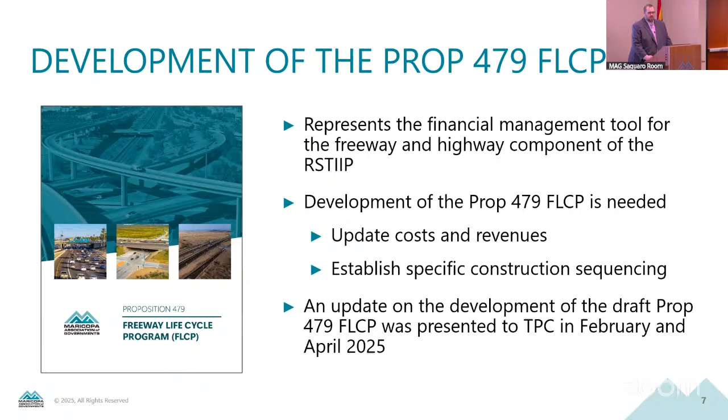As I had noted, this really builds upon several presentations that we've had here at TPC before, first in February when we talked through several key concepts, and then last month when we went through the draft program itself.

So as we're talking about the Prop 479 freeway program, there's some considerations we need to keep in mind. First, we have a statutory requirement that the program has to be balanced over the term of the half-cent sales tax, so we need to build what we call a fiscally constrained program between fiscal year 2026 and 2045. As I had mentioned, we also need to work through the sequencing exercise. Specifically, we need to identify near-term project sequencing.

Over the 20-year life of the program, there'll be a number of changes, but as we sit on the horizon of fiscal year 2026, it's really important that we identify those initial projects and get them sequenced. And then finally, there's been a number of changes since the plan was approved. Development patterns have changed, needs have changed. We've done additional study work, additional analysis, and so we need to start to incorporate some of those changes as appropriate.

Building on what we had previously talked about, some of the financial considerations that went into the program, we used updated revenue estimates that were generated last fall. This follows our standard protocol. We've been doing this for a number of years in partnership with ADOT to update our revenues, and so those revenues are factored in as part of this program.

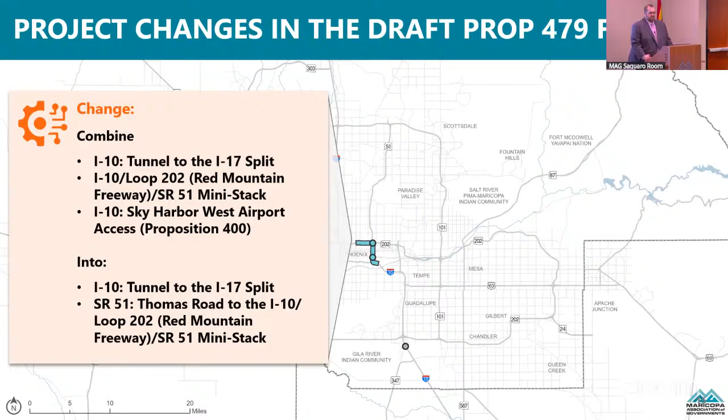And then finally, this is just reflecting updated study work that we did to reorganize, reorient those projects on Interstate 10 between the tunnel and the split. This builds off the study that was recently accepted by the MAG Regional Council, identifying initial sequencing of that project, where we would start first with the 51, take care of the mini stack, and then come through on Interstate 10.

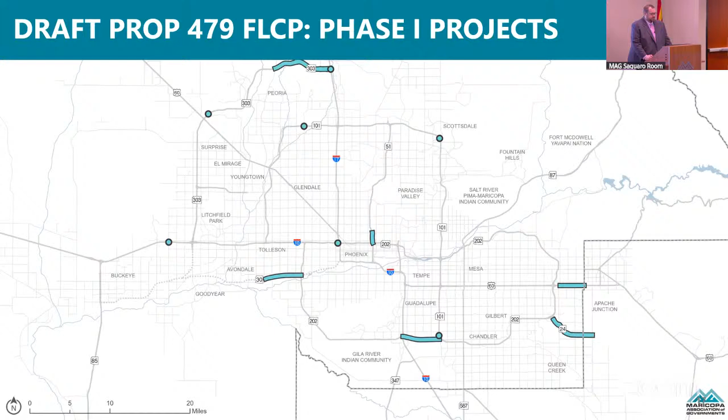Next, I want to touch on phase 1 construction projects. Here is a map of all those projects programmed in the draft program in phase 1. I want to walk through several of the short-term ones.

Starting first in the North Valley, Loop 303 at I-17. Today this is an interim system interchange, so you have to get off the freeway, stop at a traffic light, and make a left-hand turn to get onto the 303. A notable development in the last couple of years is the significant amount of development coming up here, including the Taiwan Semiconductor Manufacturing Company. Because this is an interim interchange, traffic is backing up onto the I-17 main line. This project has been under design for the last several years, funded through state appropriation. It will be ready to go to construction, and the program supports initiating its construction this summer. This would be the first Prop 479 project to go to construction.

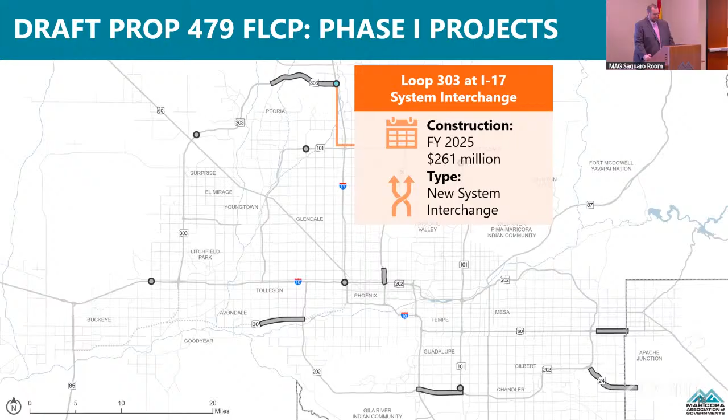We have several more in fiscal year 2026 in the program. We have I-10 at Jackrabbit Trail, another project where a lot of development in the area is overloading the existing interchange, which is in desperate need of improvements. We're also finishing the Loop 303 up in the North Valley to complement that system interchange project, and down in the Southeast Valley, turning State Route 24 into a full freeway. Today it's an interim freeway, two lanes in each direction, with stoplights along the major mile streets. This would turn the facility into a full freeway.

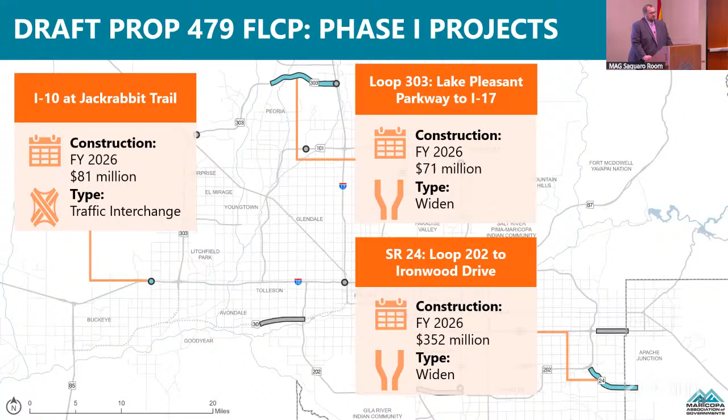In fiscal year 2027, we have several other projects highlighted by State Route 30. The first portion, which I'll talk about later, is building that new freeway between 97th Avenue and Loop 202, programmed for construction in fiscal year 2027. That's a $1.2 billion effort, but we'll be able to go to construction as soon as final design is done, which is underway now, along with completion of the Loop 202 Santan out in the Chandler area.

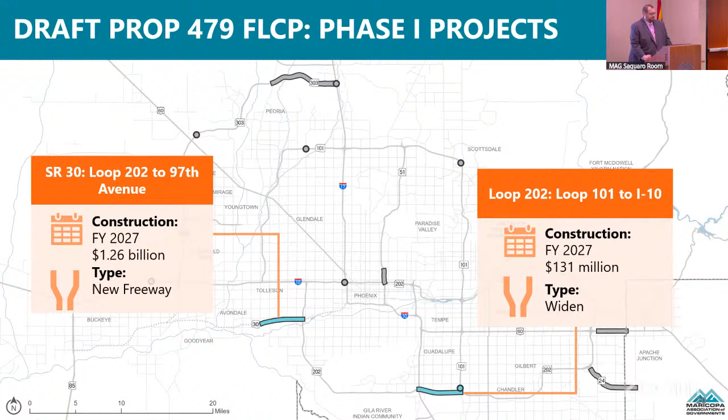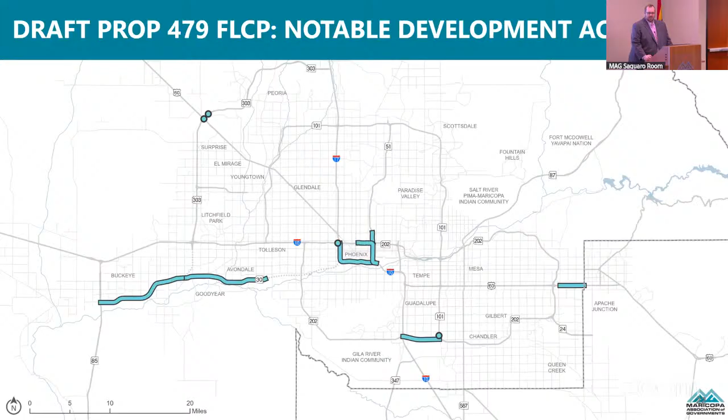Finally, I want to talk about some of the notable project development activities. When we're talking about freeway projects, it takes a long time to get them queued up, to go through the formal engineering process, to take care of right-of-way acquisition, and environmental work. So it's important we get projects queued up in a timely manner. I want to walk through several of those—projects intended to initiate scoping and environmental work, the first phase of project development, in the near term.

Included in this, I want to draw your attention to the far East Valley, US 60 Superstition, Ellsworth to Meridian Road. You heard Mr. Hoy speak about this project earlier; it addresses that need out there. This project was previously identified as part of the Prop 400 program. Funding was deferred out of the funded program back in 2020 when we had our last freeway program rebalance and had to defer a number of project costs. But in the draft program, you'll see funding in fiscal year 2026 to start the process, putting the project on track to ultimately propose construction as part of phase 1 as well.

Several other notable efforts I want to call out, because we'll certainly have conversation about them in the coming years. We have the SR30 western segment between 85 and Loop 303. The first portion of the I-17 construction, the old Maricopa portion of I-17 between the I-10 split and the I-10 stack. Advancing our planning study work at the I-10 inner loop into formal ADOT scoping and environmental analysis. And then up in the Northwest Valley, building the full system interchange at US 60.

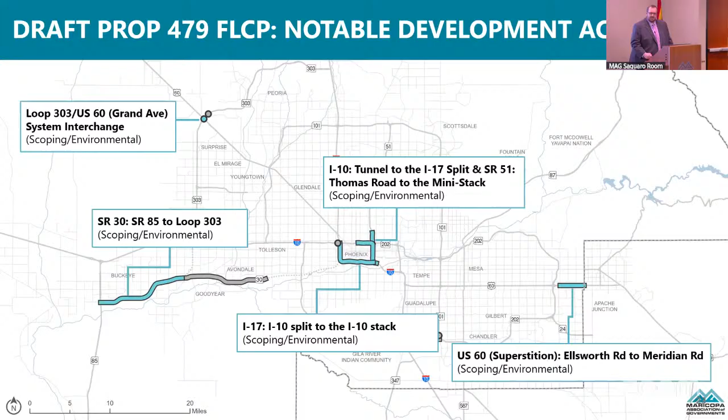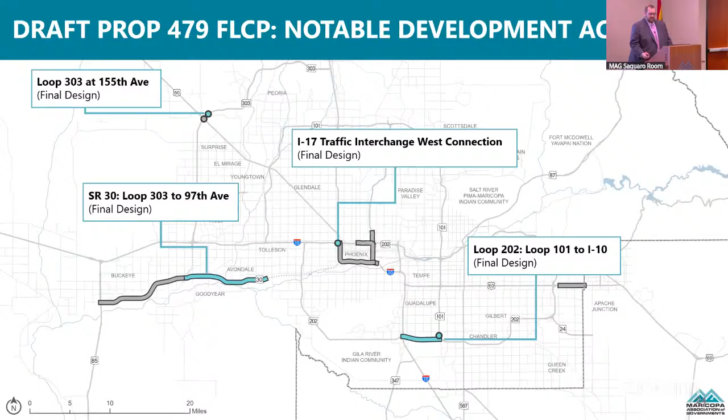Next, I want to touch on the final design activities that we also have sequenced. This is the next step in the phase. We have final design, as I'll talk about shortly, on State Route 30, as well as final design of Loop 202, Loop 303 at 155th, and the I-17 West Traffic Interchange project. Next slide please, and then finally I want to walk through some additional considerations.

I want to start by highlighting the State Route 30 corridor to reorient this committee. When we're talking about State Route 30, it's actually broken up into three different segments: the western segment between State Route 85 and Loop 303, the center segment, which is the most critical of the three, between Loop 303 and Loop 202 South Mountain, and the eastern segment between Loop 202 South Mountain and I-17.

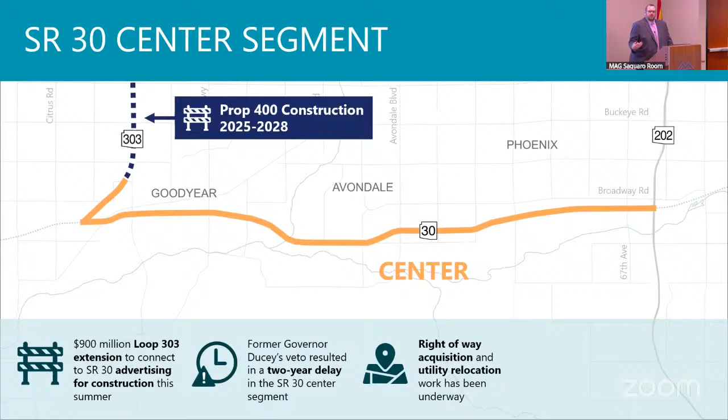A lot of work has been underway on the center segment of State Route 30. The first key component is extending Loop 303 south to tie into what will eventually be State Route 30. That's a Prop 400 funded project scheduled to go to construction this summer, soon initiating work. We've been acquiring a lot of right-of-way and doing advanced utility work. But as we look at the State Route 30 center segment, this is a project that undoubtedly has been impacted by former Governor Ducey's veto.

Originally, we had anticipated that we would be able to initiate and accelerate things starting in fiscal year 2022. As a result, we're 2 years back, and you can see that reflected in some of the implementation schedule.

As we had talked about at length last month, we've really gone through the process of trying to figure out what we can do to accelerate implementation of that facility.

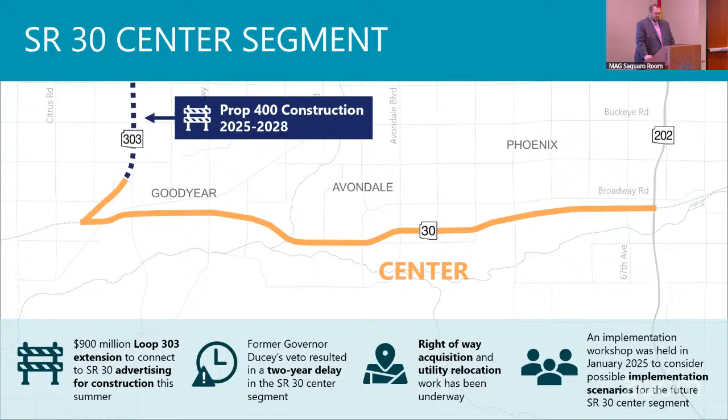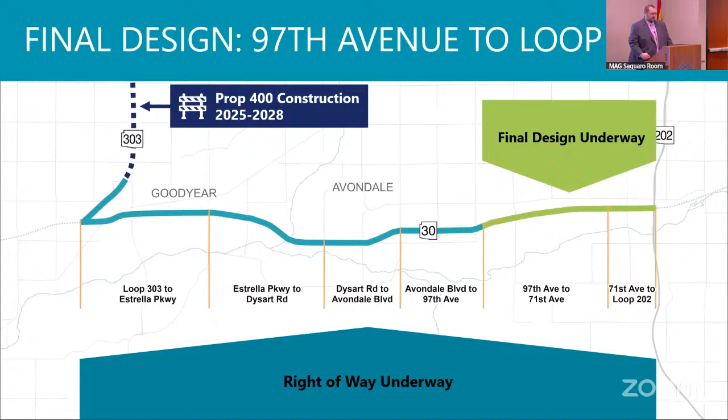Just to give this committee a little more perspective, here's the State Route 30 center segment. It's actually broken up into smaller projects. The most eastern portion of that facility is under final design now, slated to be done in fiscal year 2027. We have right-of-way acquisition underway for the entirety of the corridor, and more than half of the parcels have already been acquired or are in the process of being acquired. So certainly a lot of significant progress has been made on the center segment of State Route 30.

As a result of that implementation workshop, a couple key concepts came out that you see reflected in the draft program. We went from ultimately 5 different projects down to 4. That will accelerate construction by roughly 2 years.

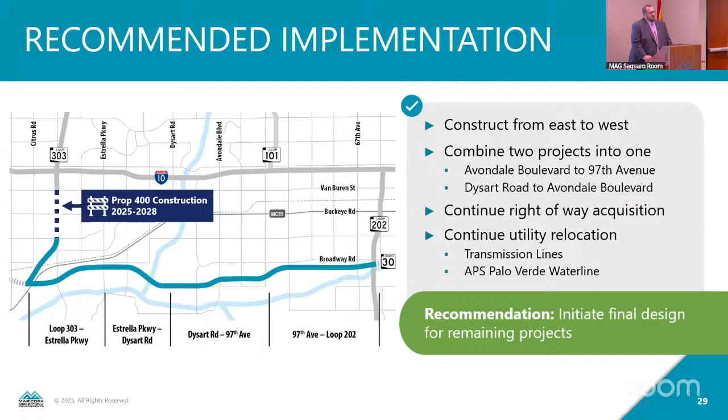We want to continue with the right-of-way acquisition process and the utility relocation process. The last recommendation reflected in the draft program is to initiate final design on the balance of the segment. That will give us additional insight into some of the needs we have. Drainage is going to be a major challenge—some of the drainage facilities we had anticipated would be there back in the teens haven't been built, so we have to take into account updated drainage availability and other elements that need to be built.

So here's the proposed sequencing of that center segment of State Route 30. As I noted, the first portion to initiate will be that $1.2 billion project between 97th Avenue and Loop 202, which includes the system interchange with Loop 202 South Mountain. The balance of the project will be constructed from east to west.

John, can you talk a bit more about the utility issues you encounter in this? Yeah, certainly. Particularly as you get towards the western segment of the State Route 30 center segment, there are a number of very high voltage power lines that require coordination with utility providers, whether that be APS or WAPA—these are massive power lines that take multiple years to relocate.

The other really big utility challenge we have is a water line that runs along the corridor, ultimately feeding water to the Palo Verde Nuclear Power Plant. That water line crosses the State Route 30 center segment in 4 different locations, requiring additional encasement. Our time availability for that encasement is limited because you have to work on the utility provider's schedule, namely taking advantage of the dry-up seasons.

So those factors, particularly in the western segment, present a lot of challenges for us in terms of time. But we've allocated funding to move forward with those additional right-of-way needs and utility relocation needs as quickly as possible to really prep the corridor for construction.

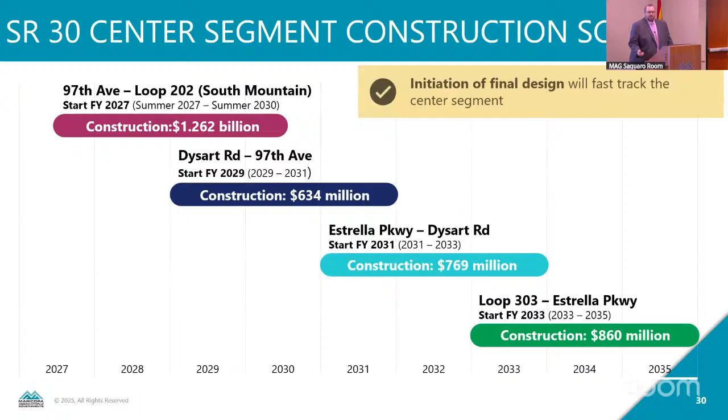So in the draft program, we are recommending initiating final design in fiscal year 2026. This is about a $100 million effort in and of itself, to give you perspective on the scope and size of this project. $100 million for final design is obviously very expensive, but it's reflective of the total cost of the project itself.

That will really fast track the project for now and allow things to get on an accelerated schedule. We'll continue to work with ADOT to look for opportunities—what else can we do to advance, and what other opportunities do we have to leverage resources to really accelerate this project?

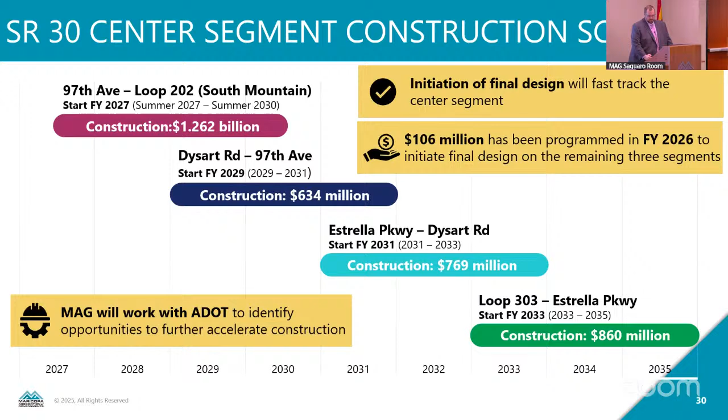And then finally, just to touch on a few more elements: the draft program continues the litter, landscape, and sweep program that we had allocated in Prop 400. We continue those freeway sub-programs that really allow for the efficient management of the program itself, and we have the $10 million set aside, updated annually for inflation, for minor improvements.

In the 479 freeway program, we have funding for pavement rehabilitation. The first project slated will be the 51, and shortly behind that, we have Red Mountain between State Route 51 and Priest.

Looking ahead, the fiscal year 2026 freeway lifecycle program is a moment in time. We'll go through this iterative process to update it. As noted, it is in balance. We were able to balance it despite significant construction cost increases, but there is very little flexibility. So if we see changes on the revenue side, or continue to see significant cost escalation, we will have to revisit the program itself. Fortunately, this is an annual endeavor.

Here's a schedule to give you perspective about when we'll be revisiting the program. This fall, we'll work with our partners at ADOT to come up with updated revenue estimates. We'll also lean on ADOT come wintertime for updated cost estimates. We'll bring that together before the Transportation Policy Committee next spring before considering approval of the fiscal year 2027 program update. So with that, Madam Chair, happy to answer any questions.

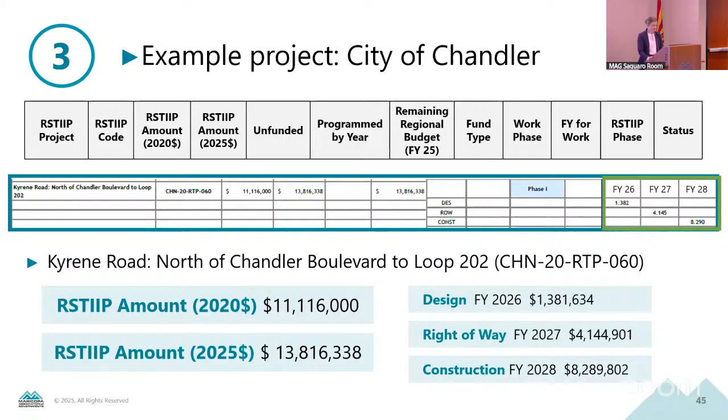So here's a quick timeline of where we've been. In April of 2025, this exact item was presented to the Transportation Review Committee. Here we are today presenting to you all, and it's on the agenda for Regional Council as well to be heard for information. Tomorrow at Transportation Review Committee, the draft fiscal year 2026 ALCP will be presented for recommended action.

And that item will be brought through the policy committees in June for approval of the draft fiscal year 26 Prop 479 ALCP on June 25th by Regional Council.

So we understand that there is an interest for changes to member agencies' projects, and this is allowable through the project change tool that's outlined in section 220 of the Prop 479 ALCP policies and procedures. So pending approval of the program by MAG Regional Council, the intent is to bring the project change tool to be made available to member agencies on June 26th, 2025.

And the project change requests would be submitted on or before July 15th of 2025.

After that, we will work with member agencies to ensure that all appropriate data and information is collected. That will be reviewed and evaluated by a street committee in September to be brought through MAG policy committees in October of this year. For reference, the project change request process is typically done in the spring, in tandem with the annual update of the ALCP.

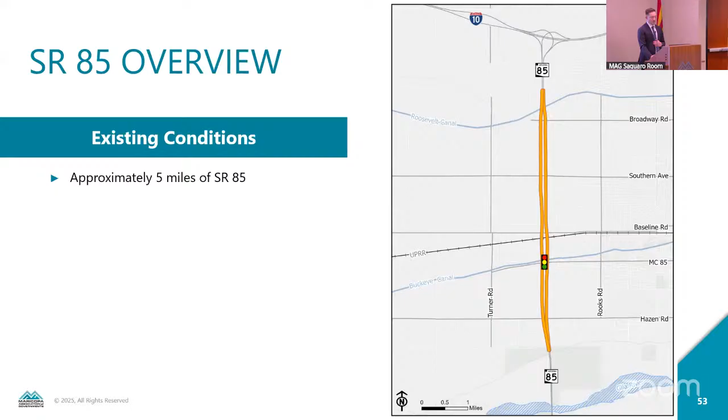So let's get oriented. SR 85 is in the Far West Valley in Buckeye. Specifically, we're looking at a section of the corridor south of I-10 to just north of the Gila River. This is approximately 5 miles of SR 85, and we're looking at 5 intersections from Broadway down to Hazen, of which one is currently signalized, MC 85. SR 85 is 2 lanes in each direction, and it is a divided highway.

Looking at this aerial image, it's kind of flipped, so southbound is on the right side. If we're heading eastbound on Broadway Road and want to go to I-10, traveling northbound on SR 85, we're currently stopping at SR 85 southbound, waiting for a gap in traffic, moving across to Broadway, going to our left turn lane and stopping, waiting for a gap in traffic, ensuring there's no conflict with westbound Broadway traffic, and finally making our left turn.

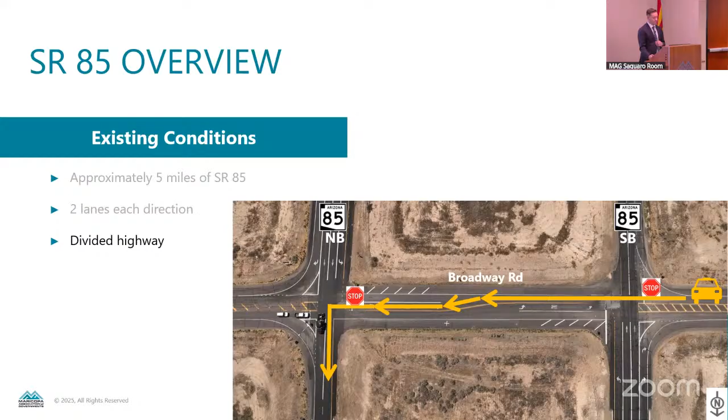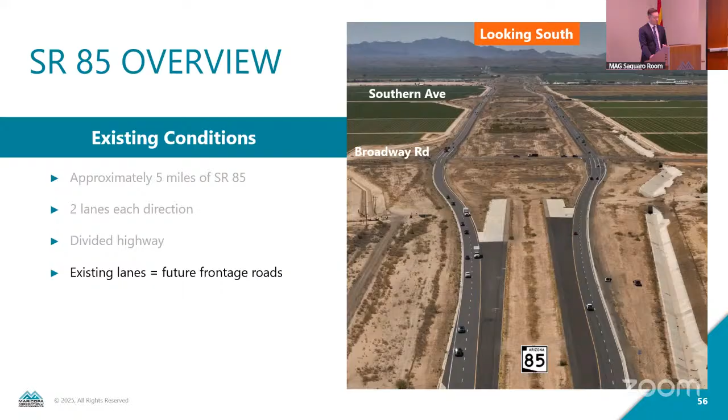The existing lanes of SR 85 are the future frontage roads. This is going to eventually be a full freeway facility, looking something like this, where the freeway will be going over the crossroads.

There are 5 study intersections: Broadway, Southern, Baseline, MC 85, which again is currently signalized, and Hazen Road. The other intersections besides MC 85 are what we call 2-way stop controlled. This just means that the minor road approaches, in this case the eastbound and westbound approaches, have stop signs, while SR 85 is free flow.

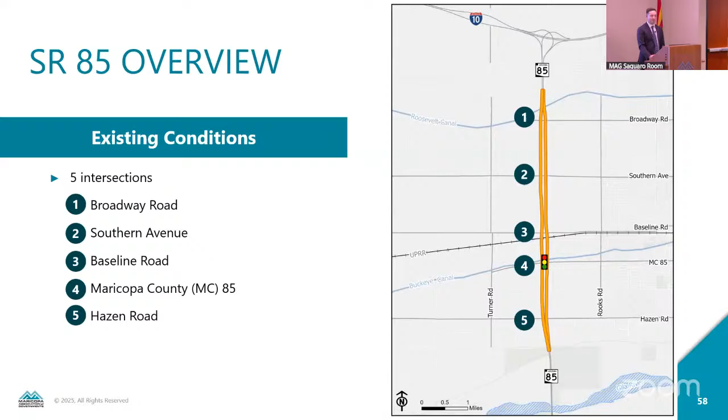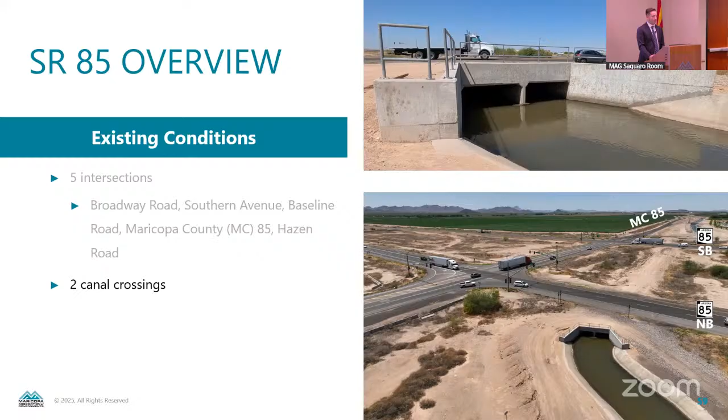In the study area, there are 2 canal crossings. The top is a figure of the Roosevelt Canal, and the bottom being the Buckeye Canal. During the study, we determined there are no anticipated impacts to the canals, but they will be a stakeholder when improvements are being made. There is also 1 railroad crossing, the Union Pacific Railroad, right near Baseline Road.

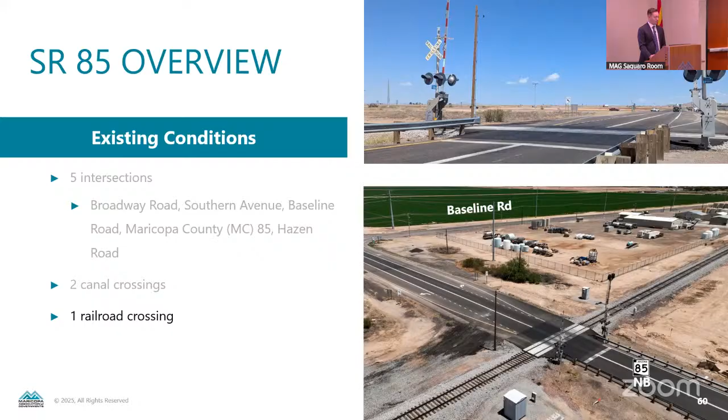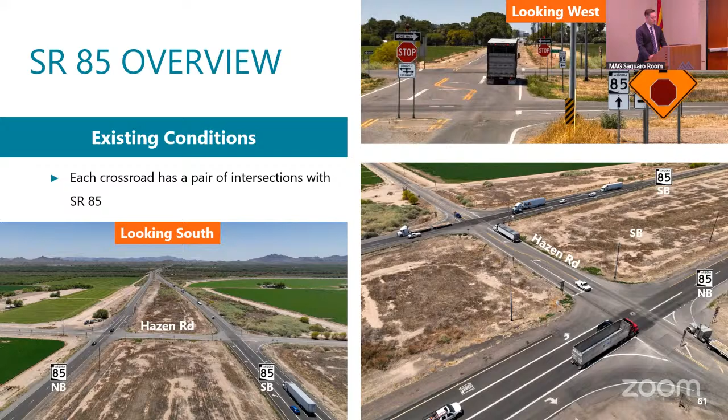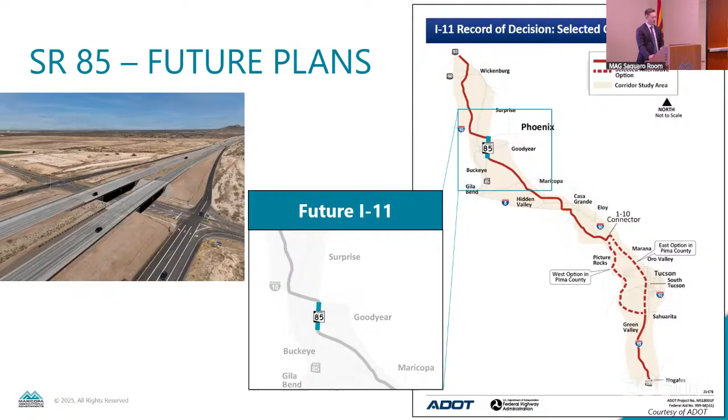Going to the regional significance of the corridor, this will be a future freeway facility. It's the selected corridor alternative for the future I-11, going from the Mexican border up west of Phoenix. As touched on in John's presentation on FLCP updates, this will be the western segment terminus of the future SR 30, right around the Hazen Road intersection, meaning this will eventually require a full system interchange.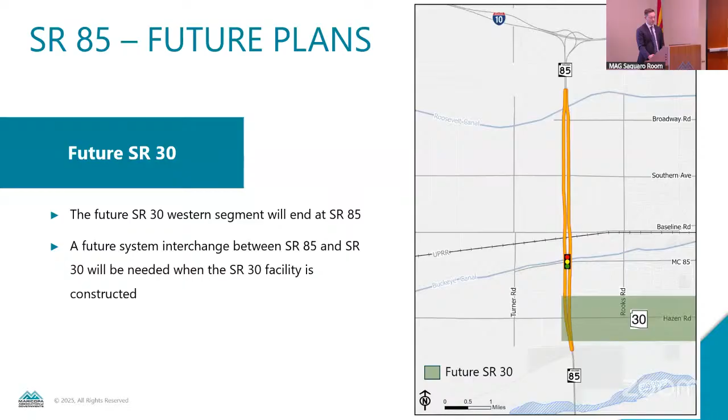So given all of this context, the reason we're doing this study is the significant development activity along the corridor and interest in development. Previously, and still currently in some sections, a lot of agriculture is shifting to industrial, mixed use, and residential. So ADOT requested that MAG establish a baseline vision for improvements to the corridor.

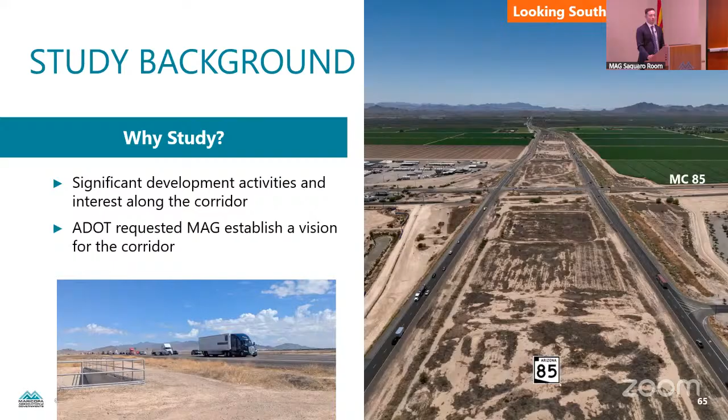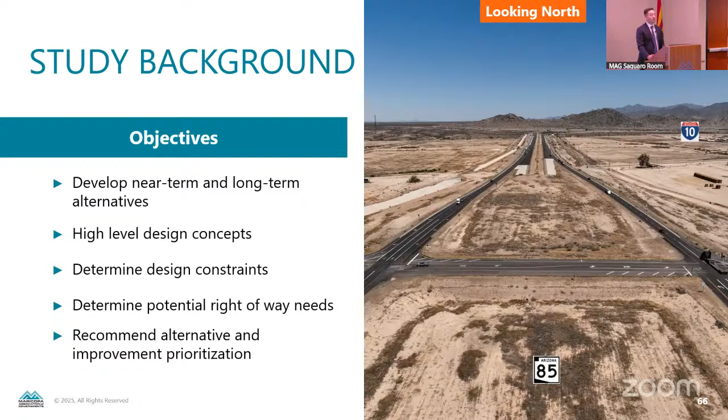With that, we set out to develop near-term and long-term alternatives, including high-level design concepts, determining design constraints and potential right-of-way needs, and finally recommending an alternative and prioritization of improvements, assuming that funding for all 5 intersection improvements would not be available at one time.

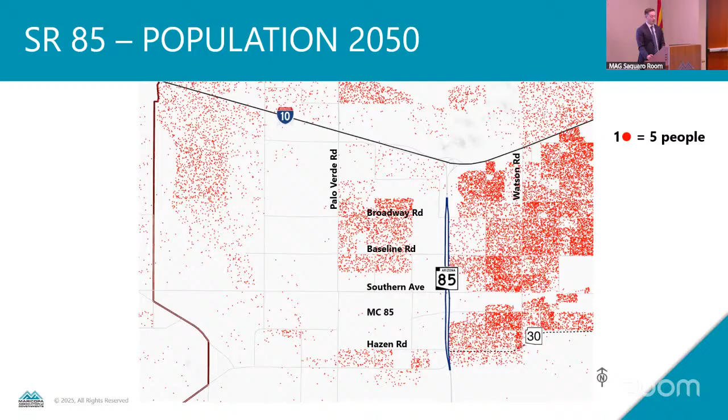So I wanted to touch on the growth and development a little bit more. This is a dot map where one dot is 5 people of population in 2023, and we projected population in 2050 — you can really see the projection exploding. We did the same for employment, 2023 versus projected 2050 employment, which is also really exploding.

There's lots of projected development, and this development happens through a lot of that freight. During our analysis, we also determined that on some segments of this section of SR 85, 32% of the traffic are heavy vehicles such as semi-trucks, carrying all of that economic activity through the region.

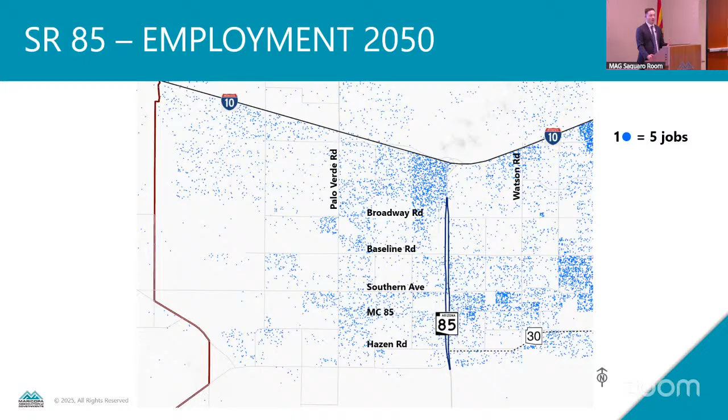As part of our analysis, we looked at historical crash data. From the 5 most recent years of crash data from ADOT, 2019 to 2023, there are 179 crashes on this section of SR 85. 74% of these crashes were at our study intersections, and over this time period there were also 7 fatal crashes, all of which were at intersections.

6 out of 7 of these fatal crashes were at the stop-controlled intersections. One was at MC 85, which is currently signalized. The others were at the eastbound and westbound approaches at either Broadway, Southern, Baseline, or Hazen.

This is a heat map of all of the crashes. We definitely see a hotspot at Baseline Road, another hotspot at Broadway, followed by Southern and MC 85 having a similar crash frequency over the last 5 years, and then finally at Hazen.

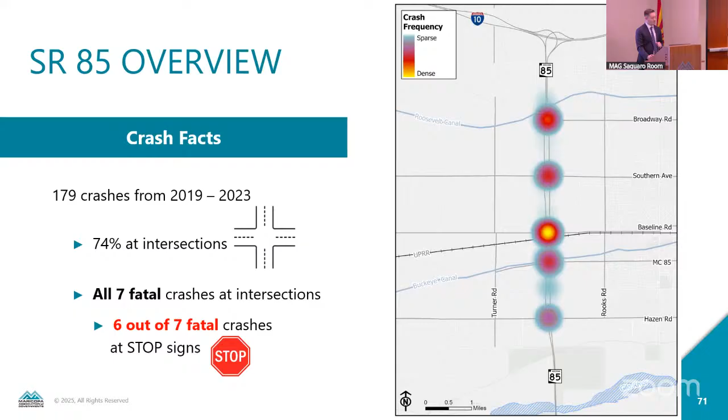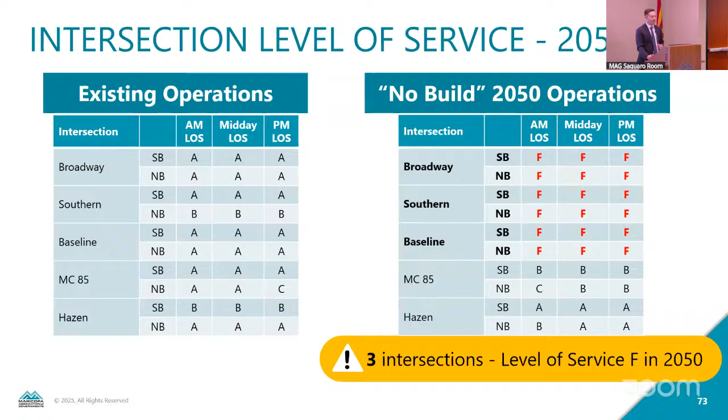We also looked at operations, and today all intersections operate at an acceptable level of service. However, if we do nothing, by 2050, 3 of these intersections will be failing in both directions during all periods of the day. So it's clear that we need to do something, and from a safety perspective, we need to be doing something yesterday.

We started this study in July. In December, we had a stakeholder workshop consisting of MAG staff, a consultant, ADOT, and City of Buckeye staff to determine the alternatives we would be analyzing. In April, we received the draft report documenting the evaluation and analysis results, and ultimately proposing a recommendation of signalization for the corridor. So we're here.

We've received comments from the stakeholders, and we'll incorporate any comments received today as well. We're expecting the final report to be complete near the end of the month.

The alternatives we decided to analyze during that December 2024 meeting focused on 2 time horizons: the short term and the long term, being that future interchange configuration. The 2 alternatives we analyzed were traffic signals and roundabouts, and it's important to note that the alternatives are really sets of alternatives.

We looked at traffic signals only for the short term and long term, or roundabouts only for the short term and long term. We did not mix and match, due to budget and study timeline constraints. We considered several different evaluation criteria, but I'll focus on operations, safety, and infrastructure impacts today.

For roundabouts, the advantages are that they tend to be incredibly safe, especially for fatal and serious injury crashes, due to the angle of crashes that occur in them and the lower speeds. However, operationally, our analysis determined that they would fail in the short term at several of our intersections and ultimately just perform worse than signals. There will also be right-of-way and infrastructure impacts due to their construction.

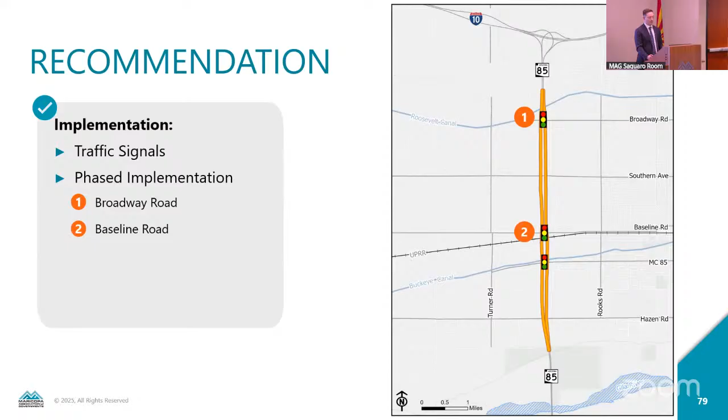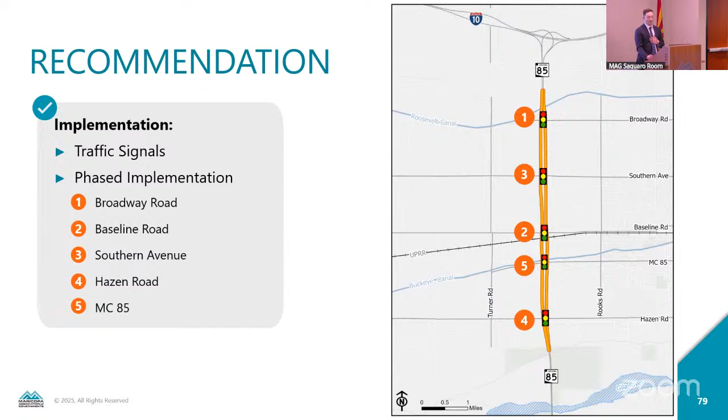So with that, the recommendation is to implement traffic signals along the corridor, with a phased approach as funding is available. First, signalize Broadway Road, which has the most traffic volume due to its proximity to I-10. Second, at Baseline Road, due to the crash frequency seen in the heat map. Third, at Southern Avenue, fourth at Hazen Road, and finally improvements to the existing signalized intersection at MC 85.

So again, we've received the draft report and submitted comments. We're meeting in a week or two to go over those comments with the stakeholders. We'll incorporate any comments received and have the final report near the end of the month. This item was for information, and I'm happy to take any questions.